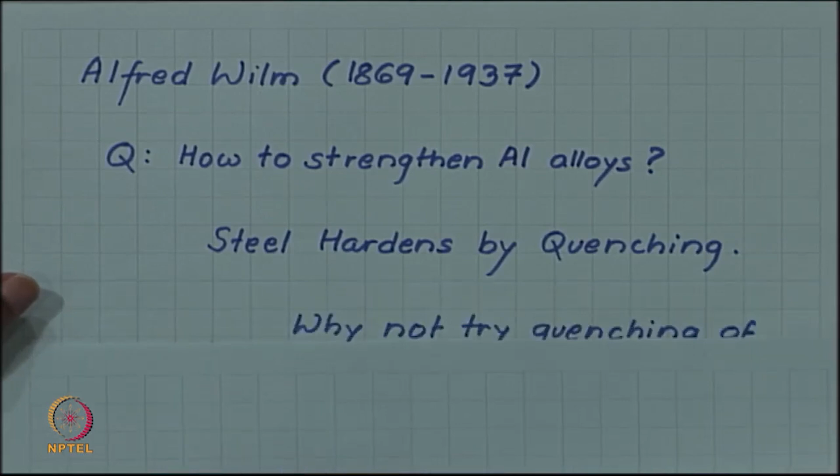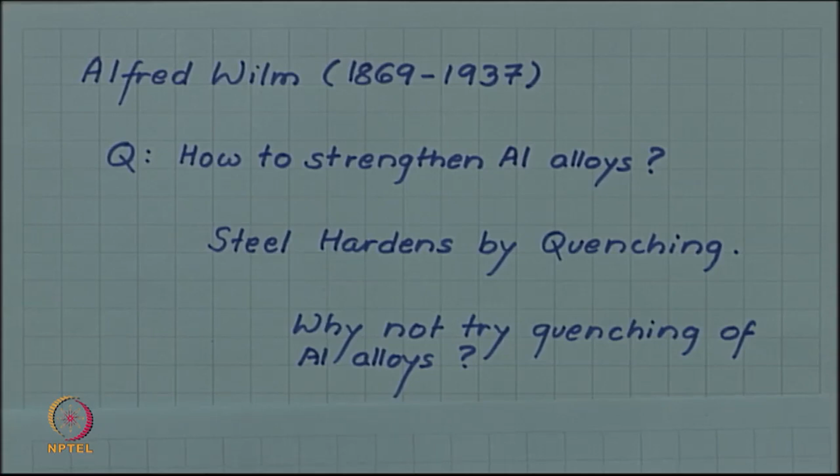So his natural curiosity or query was: can I harden aluminum alloys also by quenching? Will quenching work for aluminum alloys? So he developed a program of quenching aluminum alloys in his laboratory.

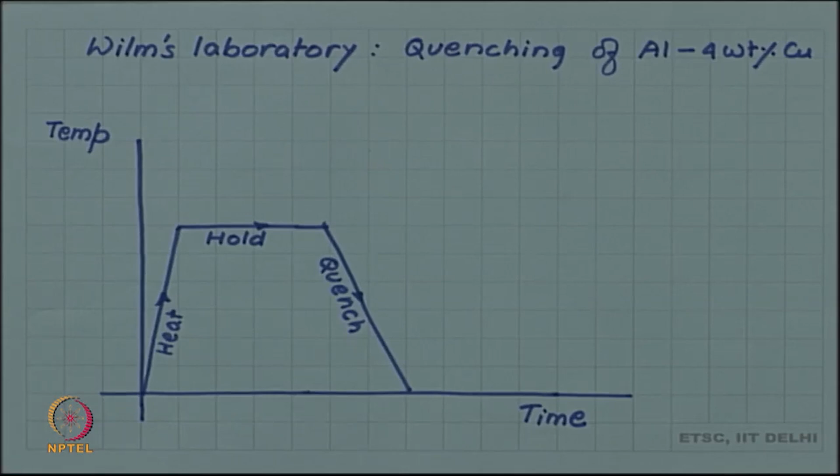Let us visit Wilm's laboratory and look at his experiments. As you know, a temperature and time graph can be made for any heat treatment process. So he planned to heat the aluminum alloy, hold it, and then quench it, and after quenching measure the hardness.

The expectation was that like steel, maybe the hardness of aluminum alloy would also increase after quenching. So this is the temperature for holding.

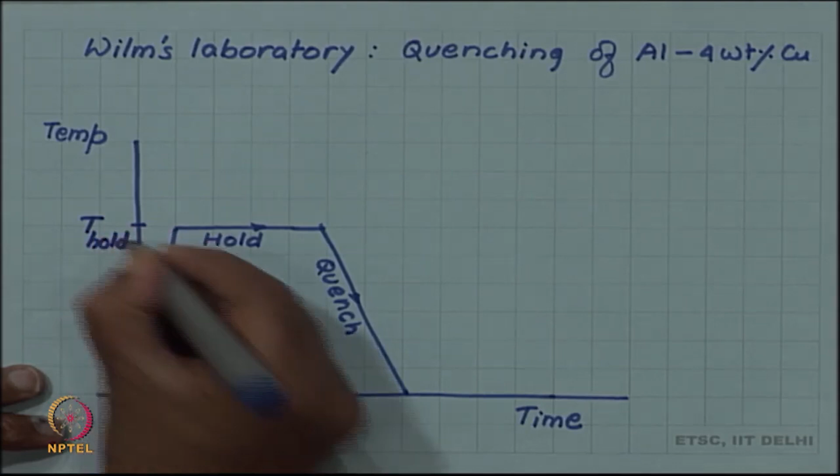He made a range of aluminum alloys, in particular aluminum 4 weight percent copper alloy. The copper percentage he actually tried ranged anywhere from 3.5 to 5.5 weight percent copper.

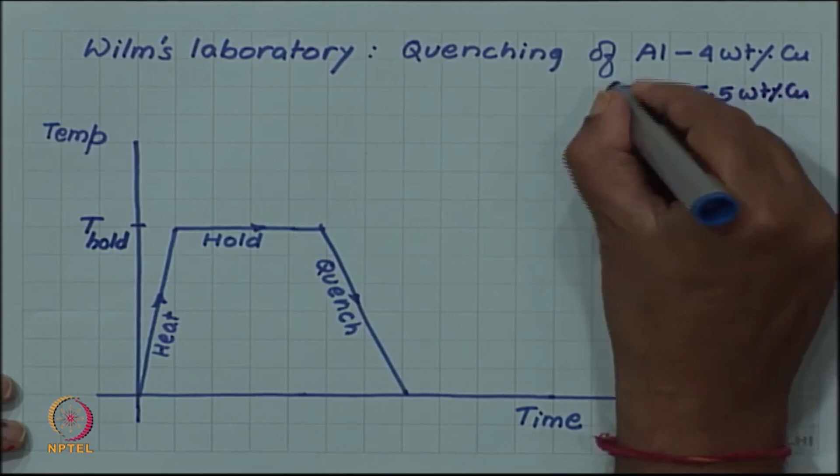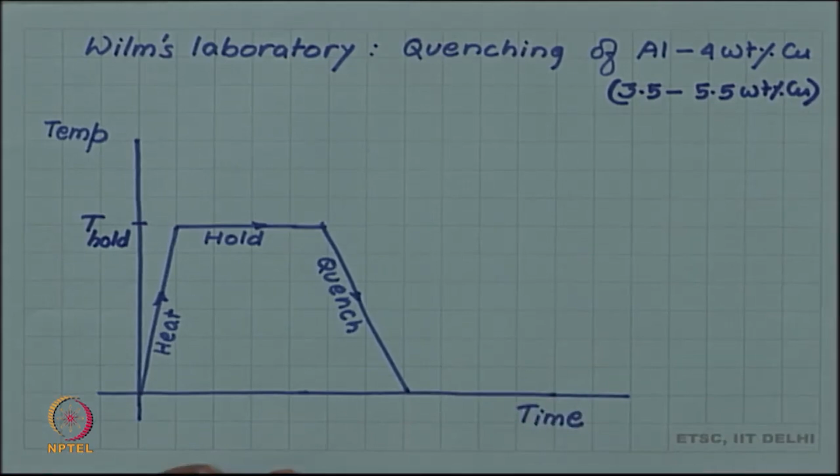So he made several alloys and then attempted this heat treatment: heat, hold, and quench, and then measure the hardness. However, initially he had no success.

He heated the sample, held it for a sufficiently long time, and quenched it, but hardness did not increase. In fact, in some cases it depressingly decreased. The hardness after quench was even less than the initial hardness he started with. So the process was not being successful.

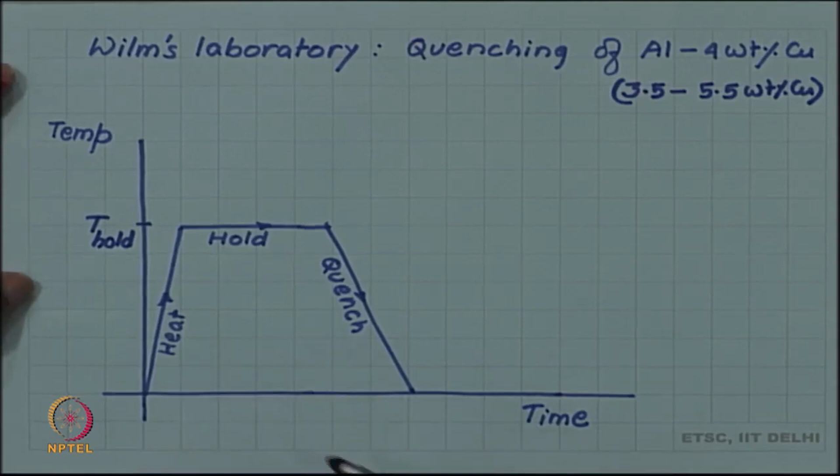But he thought about it, and he was a determined scientist. He had several variables in his hand: at what temperature do you hold, and at what rate do you quench?

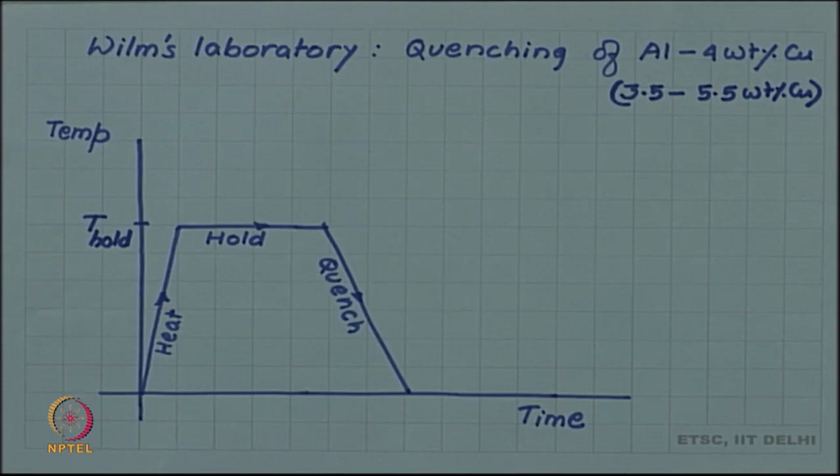We know from the steel example that if we do not go to the austenite temperature range in which austenite phase is stable, and instead take it only below the eutectoid temperature and then quench, it is not going to have an effect. You will not have austenite to begin with, and there will be no martensite forming. So if you want to form martensite, you have to heat it above austenite temperature.

So is this hold temperature important? So he varied the hold temperature.

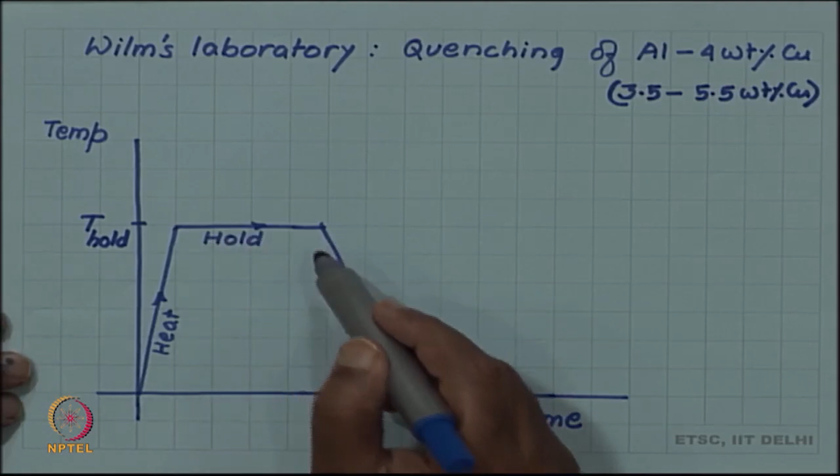Similarly, in austenite, unless it is quenched rapidly enough to miss the nose of the TTT curve, martensite will not be produced. So the quenching rate should be sufficiently fast. So he varied the quenching rate.

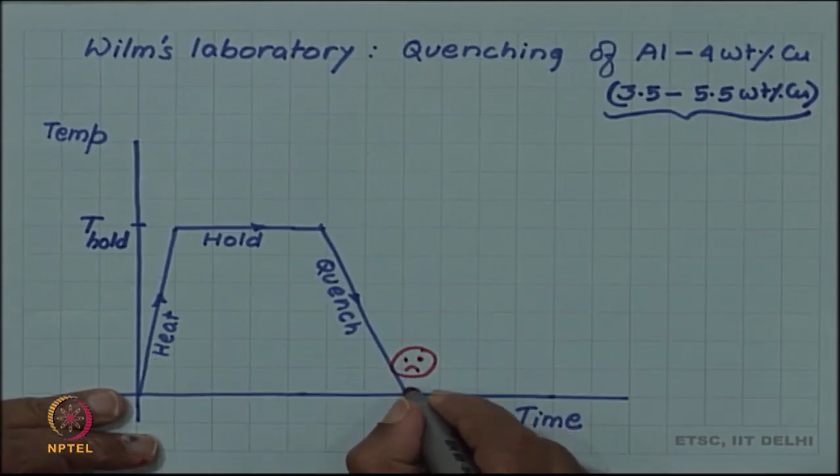With all these experimental variations, and of course variation of alloy content also, none of these runs gave him any success. In the end there was no increase in hardness, and he was not a very happy person. No hardness increase.

On a Saturday morning, he decided to run the experiment again with some new variables, and he ran one set of experiments on this Saturday morning. But outdoors he found beautiful sunshine, and he was a lover of sailing.

So he decided - he heated, held and quenched - but before measuring the hardness he decided to go out for sailing, to have a nice sailing weekend. So he leaves for the weekend, does not measure the hardness of the quenched specimen, goes sailing, and comes back on Monday morning to resume his experiment.

When he resumes and repeats his experiment, when he measures the hardness of the specimens which were quenched on Saturday but not measured then, and he measures the hardness on Monday, he finds an increase in hardness. Hardness has actually increased.

He did not believe himself and worried how the hardness had increased, since it had not been increasing for so long. So he wondered about this and tried to repeat the experiment again. He freshly quenched the same specimen under the same condition on Monday and measured the hardness. There was no increase in hardness.

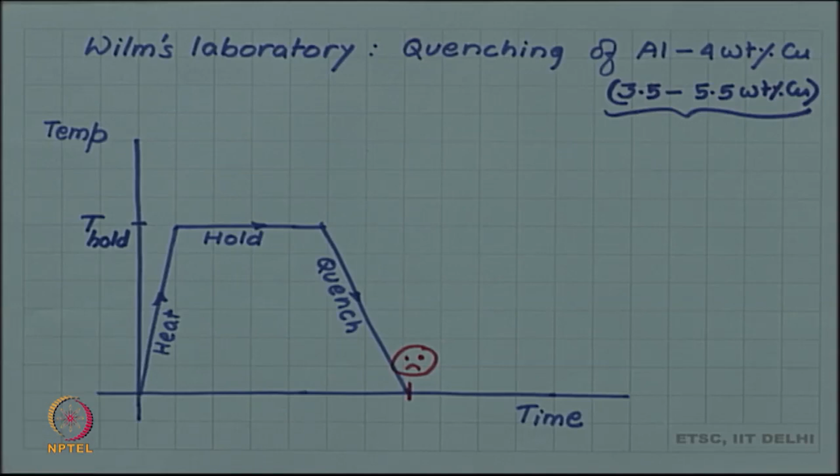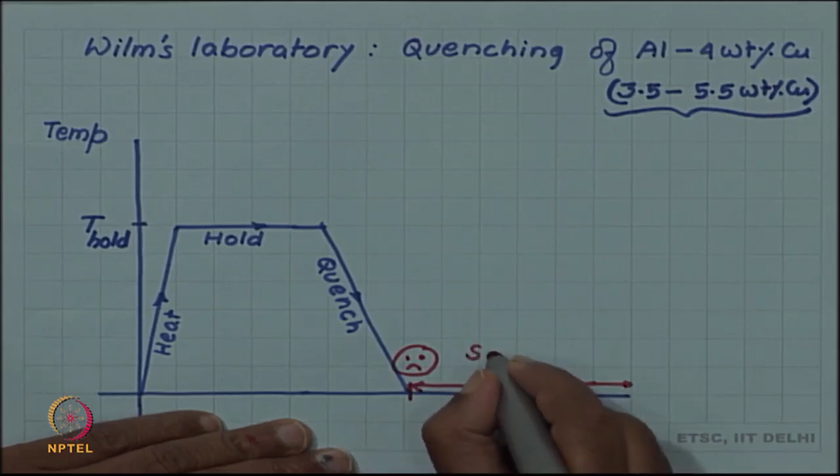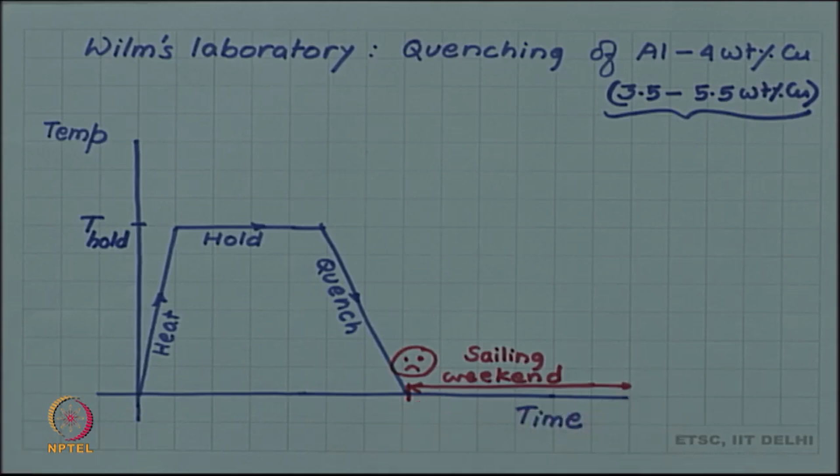Then it struck him, is it the weekend effect? Is it because he quenched the specimen on Saturday and measured the hardness on Monday, allowing this period of weekend, this sailing weekend, that hardness is increasing? So he did a control experiment where he quenched and deliberately waited long enough before measuring the hardness, and he found that yes, hardness is increasing simply because of waiting.

So finally his research was successful. He found a way of increasing the hardness. Hardness does not increase simply on quenching, but on quenching and waiting. That is, as time passes, hardness seems to increase. He did not have an explanation, but experimentally he could prove that hardness increases as a function of time.

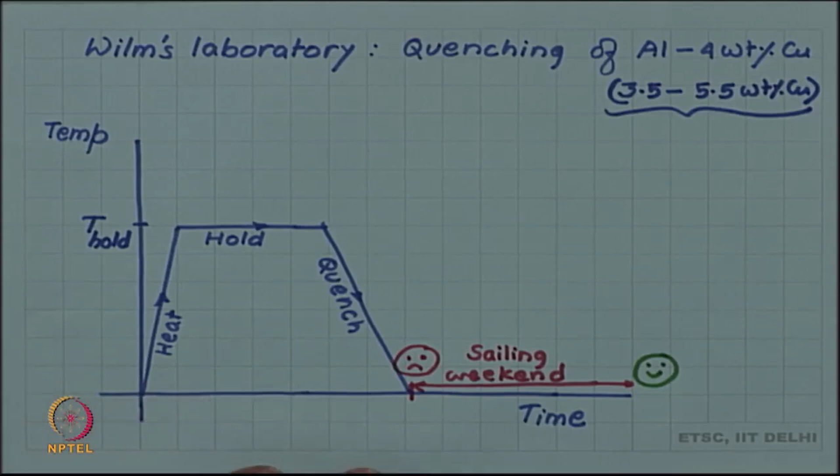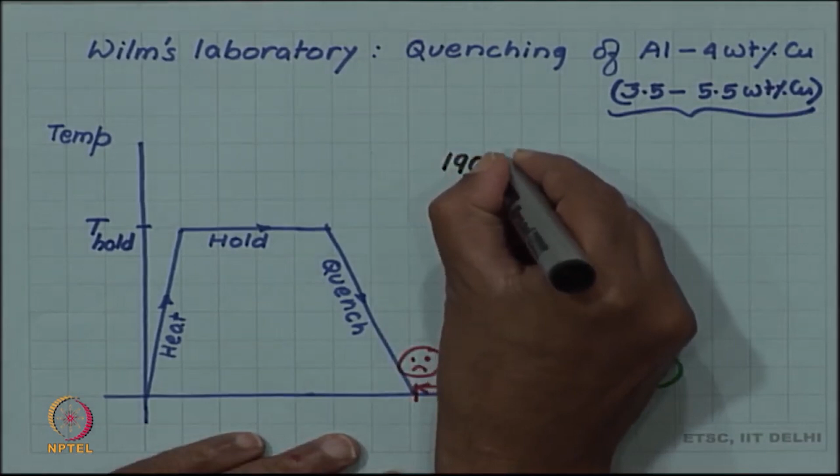This was in 1906. So the discovery was in 1906, and he called the process age hardening. He gave it that name because simply by aging, simply by waiting, hardness is increasing.

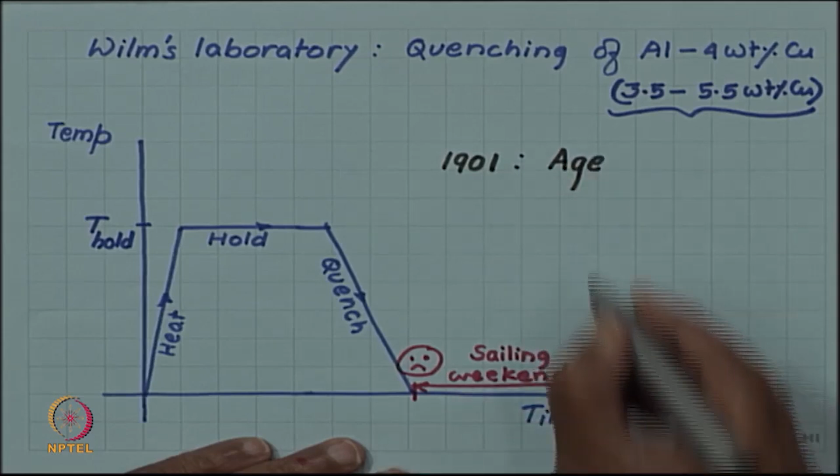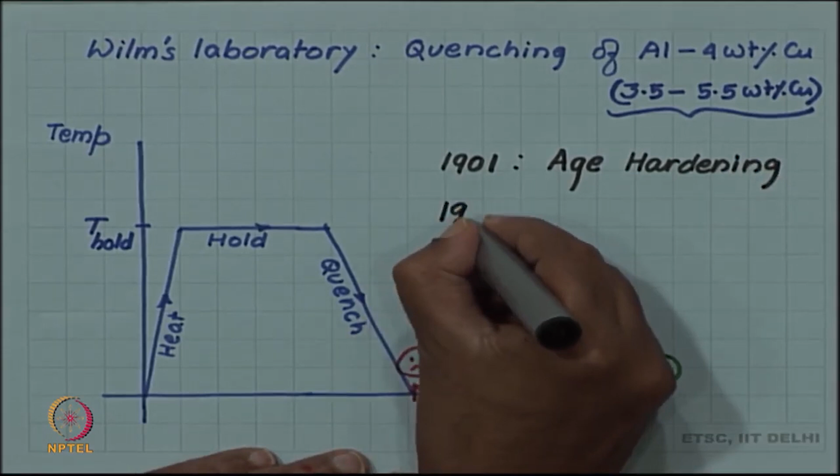And in 1906 he patented the alloy and the process.

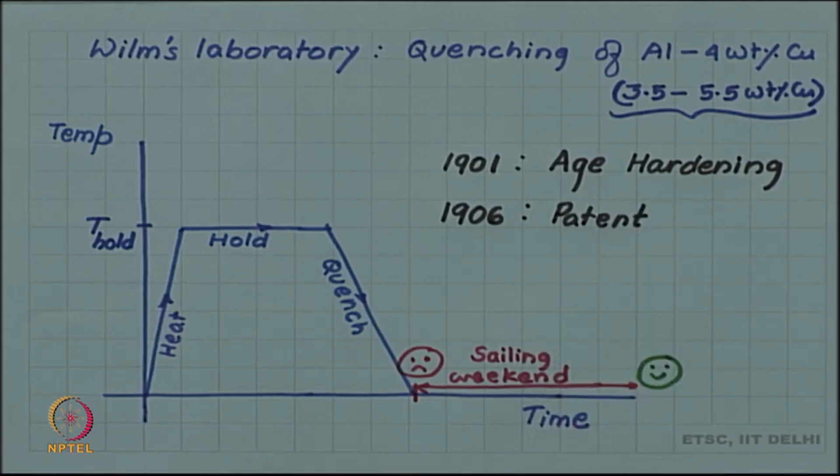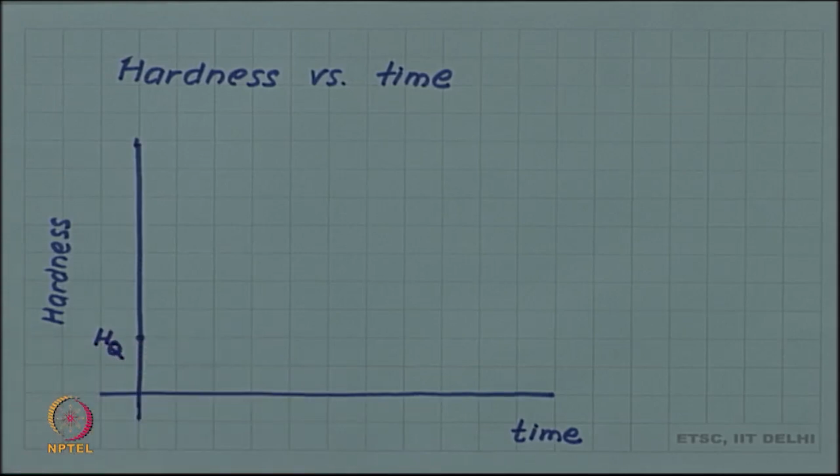So let us look at what he found on aging, or how the hardness changes as a function of time. After quenching there is a hardness value, let us call that HQ, hardness in the quenched state. Then as time passes the hardness starts increasing and going up, but at some point it reaches a peak and then decreases.

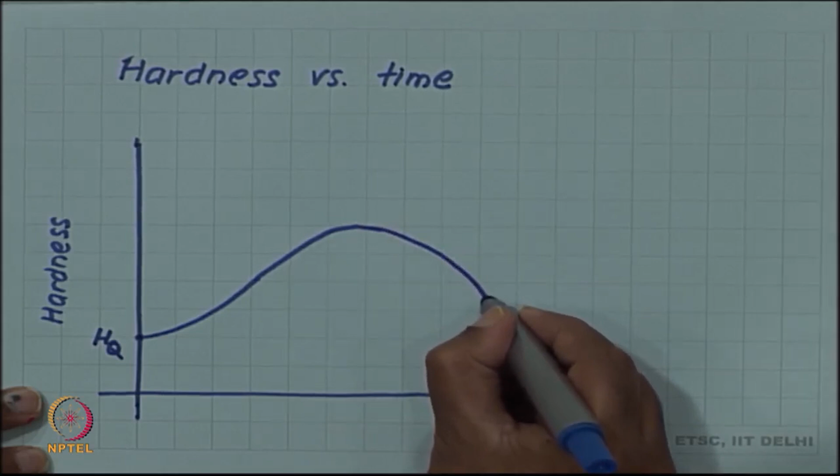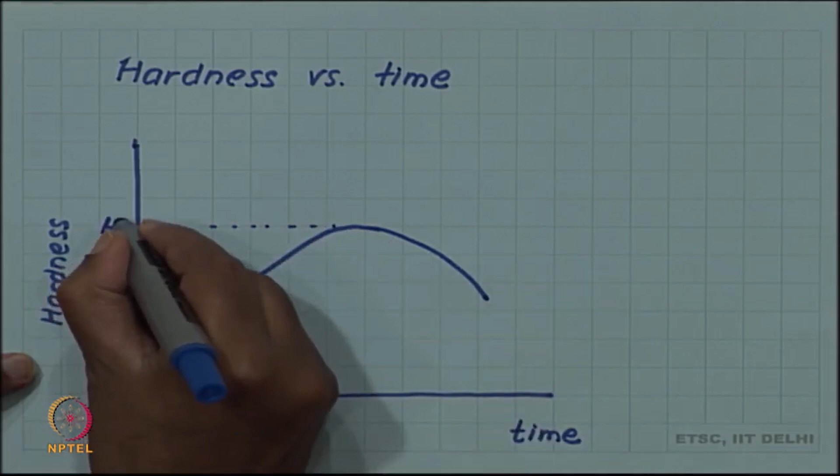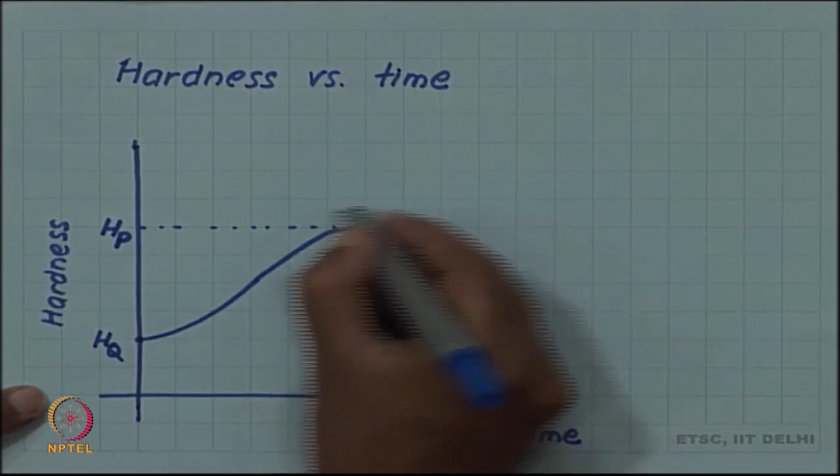Let us call this the peak hardness. So in fact there are two surprises: why the hardness increases as a function of time, and then why it subsequently starts decreasing. This point is called the peak, so HP is the peak hardness, and the time corresponding to the peak hardness, let us call that TP.

So this part of the curve is called aging, and beyond the peak we call it overaging.

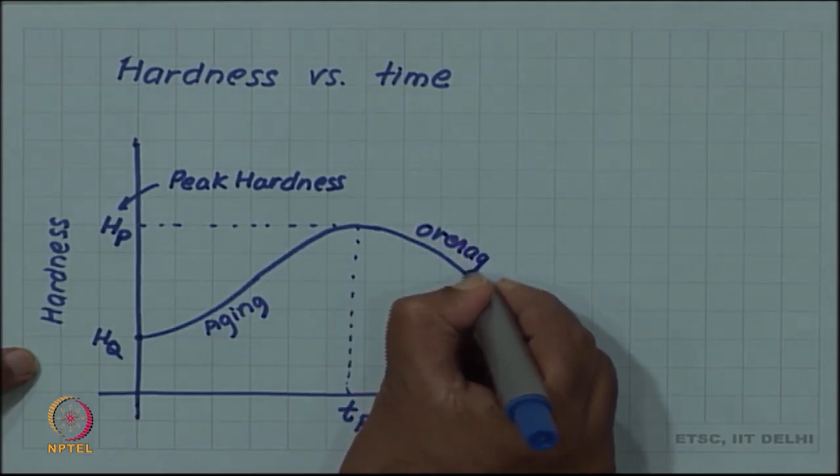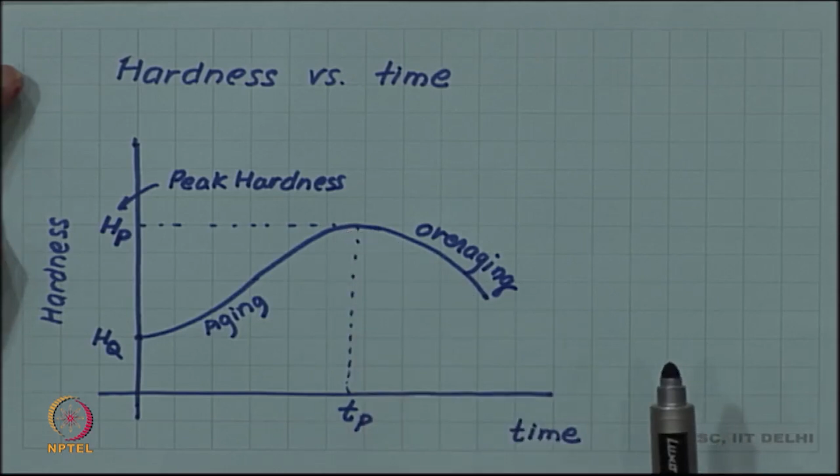I sometimes like asking students why hardness decreases after attaining its peak during overaging. What is the reason for this decrease? I once got a very interesting answer that since by definition the peak hardness is the maximum hardness, hardness has to decrease after the peak. Well, let us try to see what really is the reason for this decrease.

First of all, property is a function of microstructure. This is our main theme in the material science course, and we have seen this nicely, particularly in the microstructure and property of steels. We saw that in the same steel of 0.8% carbon, we can get hardness values differing by a factor of 4, a hardness of 15 Rockwell or a hardness of 65 Rockwell, simply by controlling the microstructure. So microstructure is an important determinant of property in steel of the same composition.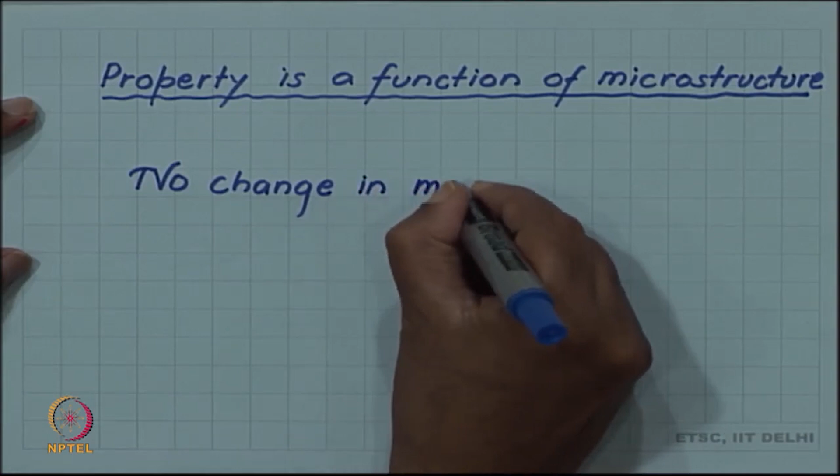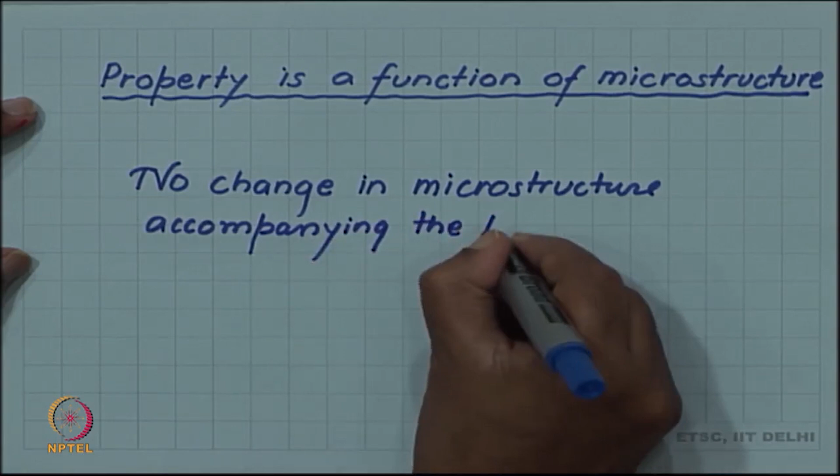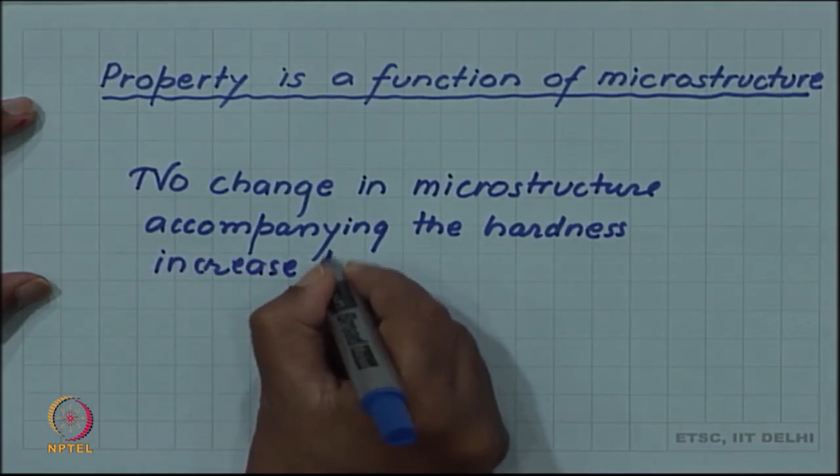So here also, Wilm was a good metallurgist and knew his subject, so he tried to study the microstructure of his aluminum alloy in which he was seeing hardness increase. Surprisingly, he got another surprise: there was no change in microstructure accompanying the hardness increase. So overall the process was very intriguing. Initially the hardness is increasing, then the hardness is decreasing, and you are not finding any corresponding change in the microstructure. So what is the reason?

What is the reason for all this phenomenon? We will look at it in detail in the next video.